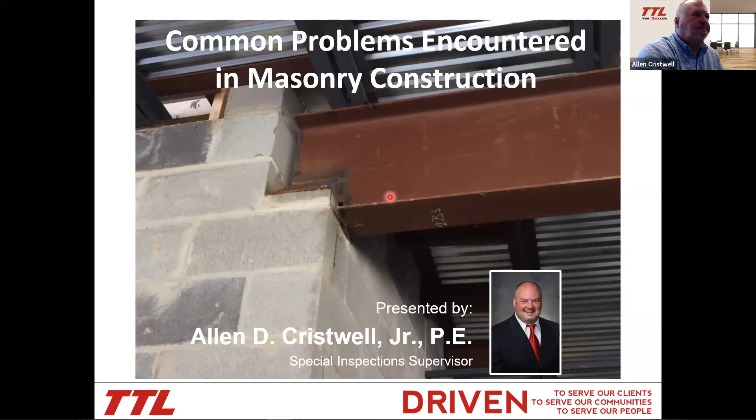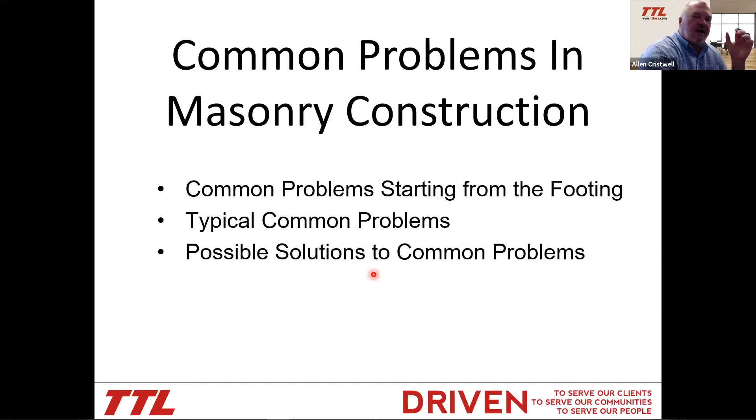So again, common problems encountered in masonry construction. Well, there's a lot of problems, but some of the most common will start at the footing. It's always important to get the footing correct. I'm going to talk about some typical problems, and then some solutions to common problems, and I'm going to put slides in here or photos to show these common problems. I don't have photos for all of it, but all the stuff I've experienced is in here, most of it.

So here we go, starting at the footing. Now the footing is important. If the reinforcement is correct from the footing, it makes everybody's job easier. If it's not correct in the first course or two, you have to fight it all the way up. And if they get several courses from the footing up, or from the top of slab up, and it's wrong, it's hard to drill and epoxy through a lot of courses of masonry. So it's always important to catch it, usually like the first course. If you miss it, it's tough, and if they lay up 8 courses, you can't even hardly see it. So the only way to repair it a lot of times is removing the wall. So if you catch it at the footing, it's the best, it'll make your life easy.

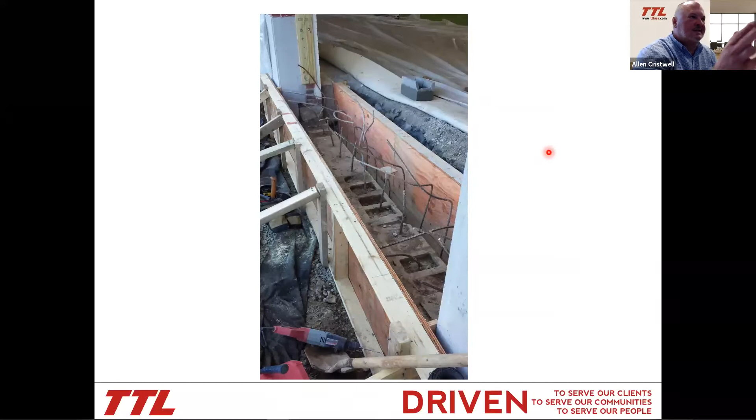Now this is a footing that was supposed to have block laid on it, and they decided to pour concrete on here because, of course, this footing, you couldn't lay block on this footing. So they decided, well, we'll just place concrete, then we'll pour the slab over. So they changed the design. There are two contractors involved: there's a concrete contractor and there's a masonry contractor. And this does cause problems because these contractors work independently of each other. On a small job, the concrete contractor will come in and do his work, and then the masonry contractor will show up to do his, and the concrete contractor will be gone.

On a large job, say a school or something that has many buildings, a lot of times it's nice that the concrete contractor's still on the job. The masonry guy just shows up, and if he's missing doweling, the concrete contractor can come and do it, but that's not always the case. So the concrete contractor lays out the dowels and he lays out the vertical reinforcement for the masonry contractor, usually without help or input from the masonry contractor.

And of course, then the masonry contractor comes back and he lays up several courses to the top of the slab, and the contractor comes back in and he pours the slab. It fills up those few courses above the footing. And when he does this, there's a lot of problems that get encountered.

So problems that typically get encountered, I would say, is window openings. There's certain things that just aren't considered, like window openings. That might not be shown on a structural drawing, or when you're doing footings, you may not worry about where the windows are, because you just don't think about it. Jambs, door jambs, you really don't care where those are either a lot of times.

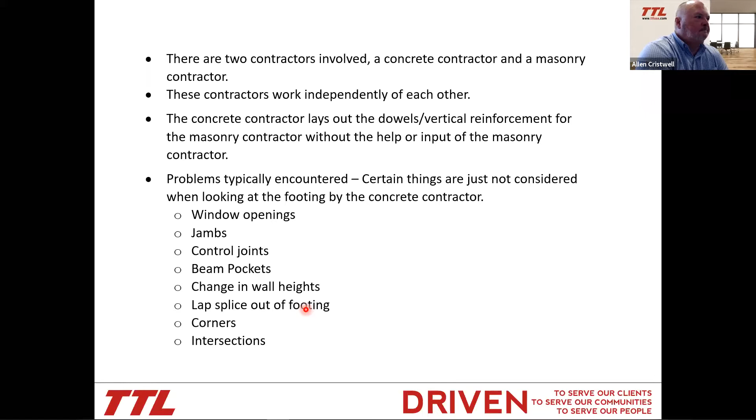So the concrete contractor has structural drawings and shop drawings, which may not show all locations for reinforcement. Structural drawings show typicals, which are applied throughout. Many times these typicals do not get applied during construction. Structural drawings typically do not show openings, control joints, etc.

The concrete contractor also has shop drawings, which may show corners and intersections on the layout, but will not show openings and control joints. So a lot of these concrete guys, they may have a crew out there, and they may be doing the footing, and they're not really thinking about, wow, I need architectural drawings out here for this, because they just don't think about it.

Well, architectural drawings show all your openings, shows your doors, shows your control joints. It may show the control joints in the slab. There's all kinds of things.

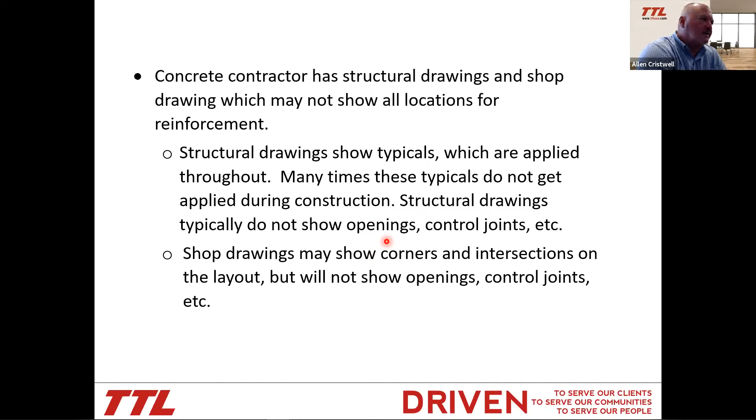The masonry contractor arrives on site and starts placing CMU. The masonry contractor will let you know very quickly it's not their job to drill and epoxy any missing dowels. And many times I've seen masonry workers lay block, either knowing or not knowing the doweling was wrong. And when notified that additional reinforcement is required, they've replied that it isn't really their job to place the reinforcement. and I need to go tell somebody else, and they'll just keep laying block.

So there is a little bit of juggling going on right there. It usually will work out, but you have to stay on it as an inspector or it'll get overlooked. Because again, once they get up so high, you can't correct it hardly. It's hard because the wall's too high. And of course, by this time, the concrete contractor has left the site. So it always seems to be a conflict.

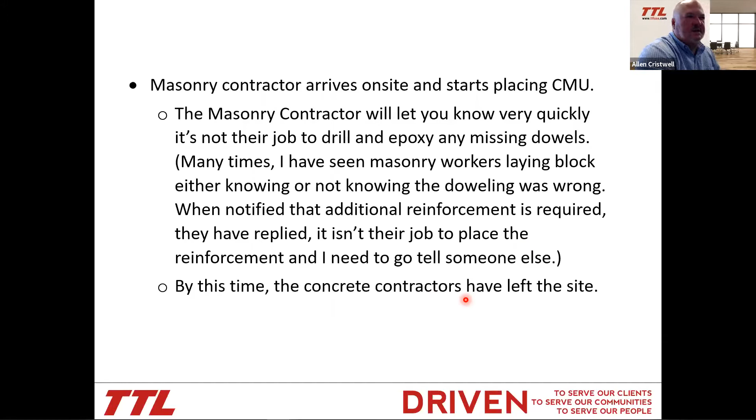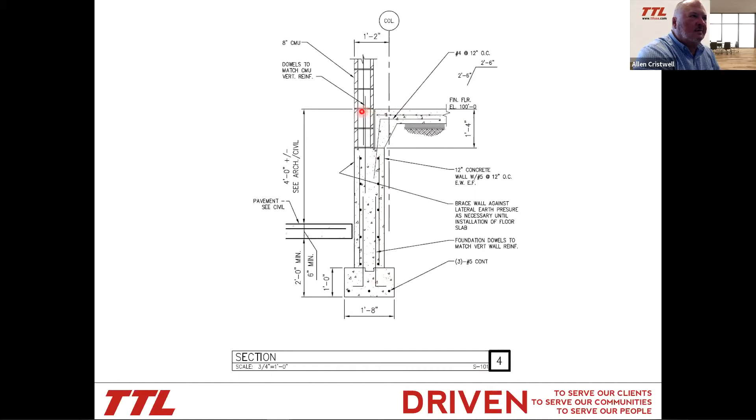Now, what happened on this job is the contractor came in where he was going to pour his slab. Well, he went ahead and filled his block up and didn't really worry about it. And he left too short of a lap splice. And this is what you'll get.

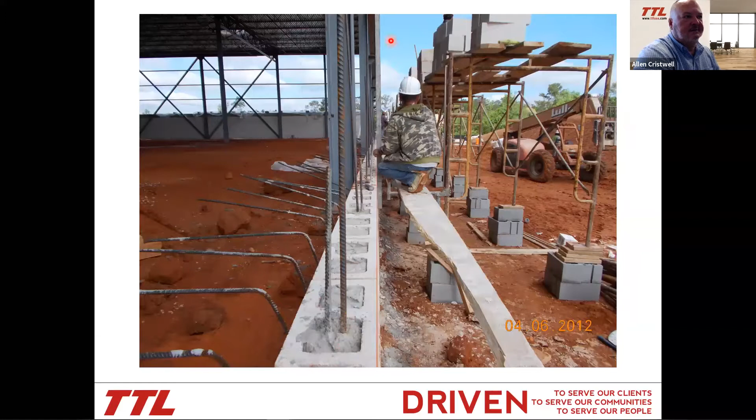This was about 15 inches. And you can say, well, that's 16 inches right there. So, you know, that was like 14, 15 inches. Some were a little high, some were a little low. So the result of this being overlooked was you had to drill and epoxy all the reinforcement, doweling.

I also want y'all to pay attention to some of the scaffolding and these boards, some of the scaffolding boards, because I want to talk about scaffolding later.

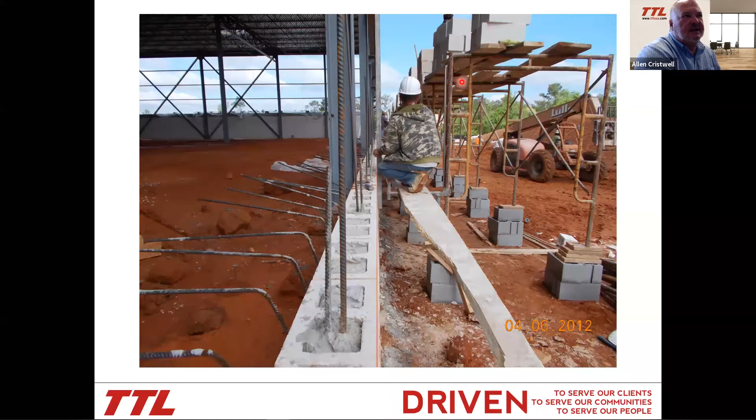Here's another example. Again, there's a cut, I think 5 on SO2. If you look here, here's your footing, and here's your center dowel coming up - that's the concrete contractor's job. Then the mason comes in and does this, then the concrete guy comes back and does this. You just got a lot of trades back and forth.

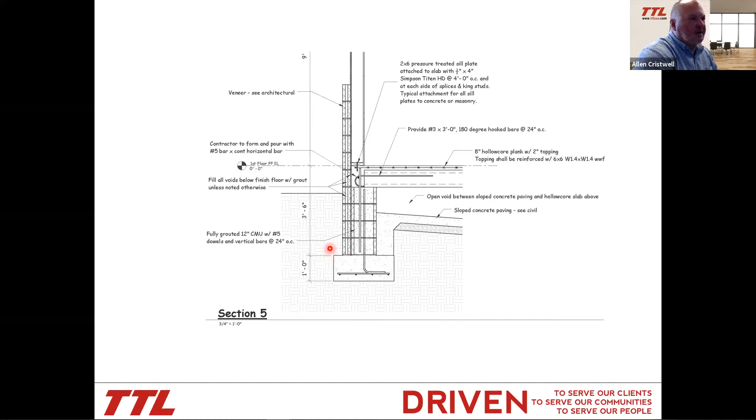So I want to show you this picture. Here's the footing, here's the center of the footing going through here, and this is the doweling. Can y'all see how that dowel goes? Right here, the dowel is all the way over here - sometimes it's off in the dirt, so you'd be laying your block out here on the dirt. This is a common problem, happens quite a bit. Just want to show that to you guys.

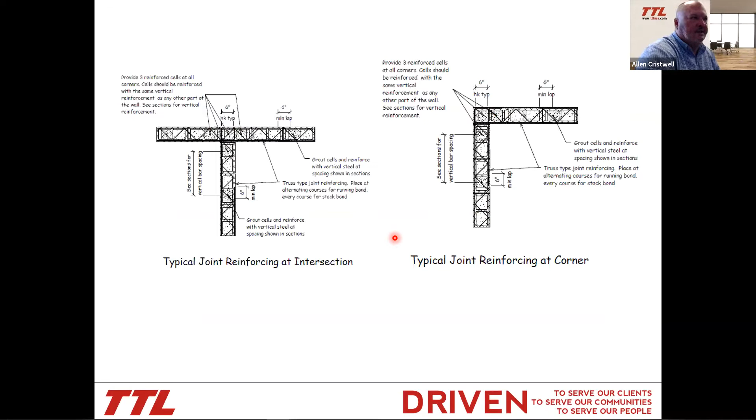Again, reinforcing in corners and intersections. There's 1, 2, 3, 4 in this one, and 1, 2, 3 in this one. This is common, this would be in the front of the typical sections, in structural drawings, in the typical sections - might be in shop drawings too. It's hard to say, it'll be in a lot of different places, but it may not be on the actual plan view for the foundation. It usually isn't, sometimes it is. I've seen structural drawings that had that, but not very often.

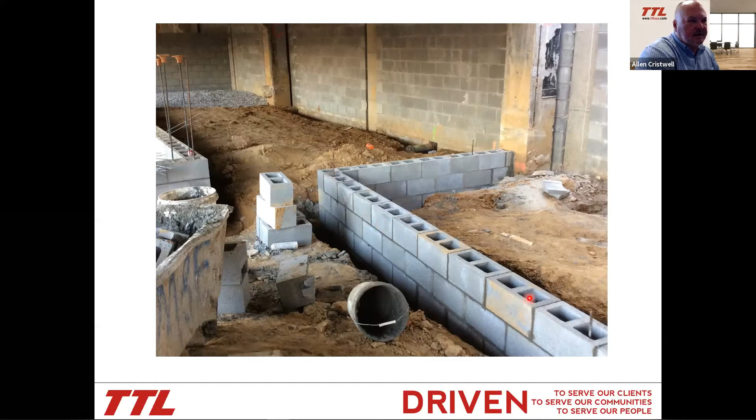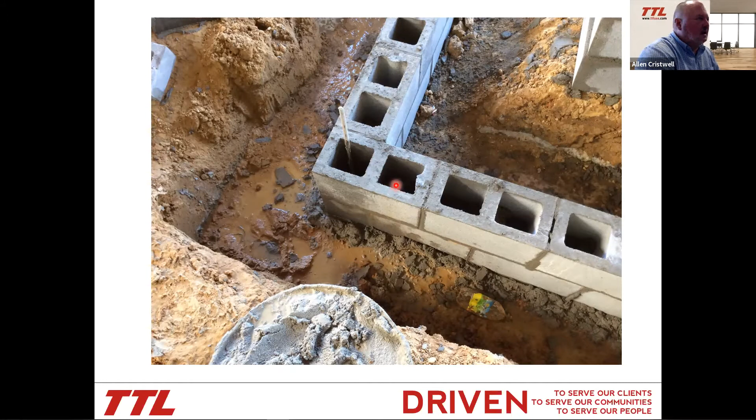And of course you can see here our corners are missing a few. This one they did pretty good - you see here, look at this spacing. They've just pretty much missed it all. Again, just common problems, you got to correct this. 1, 2, 3 - so you should have had 3 in the corner. Again, should have had 1, 2, 3 in the corner, then 1, 2, 3, 4 over here. And you see, since this wasn't caught right away, a lot of this will have to be torn down.

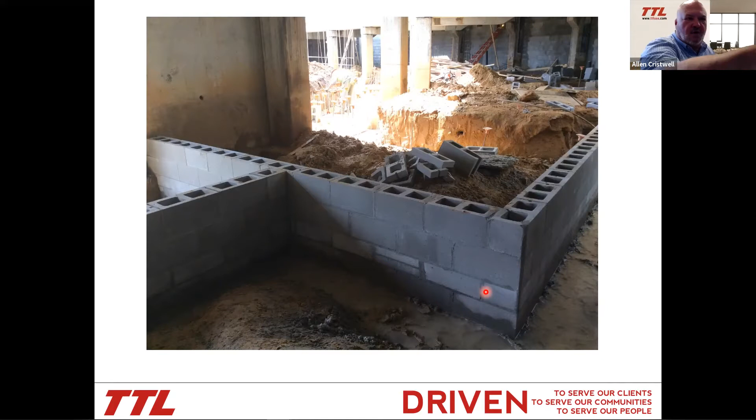Because you can't drill and epoxy this - it's hard to clean the holes out. You have to blow them and brush them, blow them and brush them 3 times. And then there's mortar droppings down in here. It's just very difficult if it gets away from you.

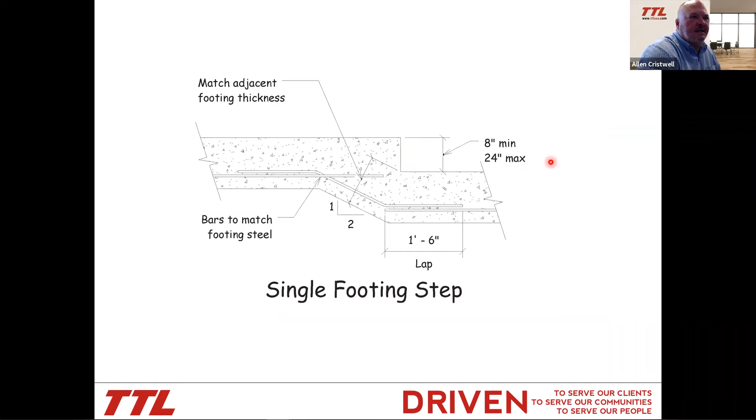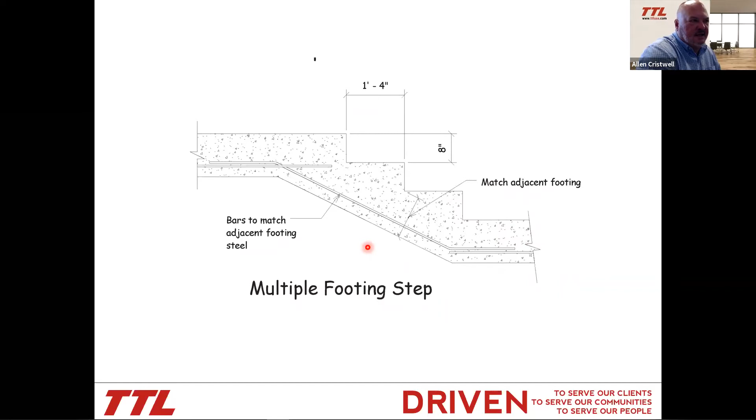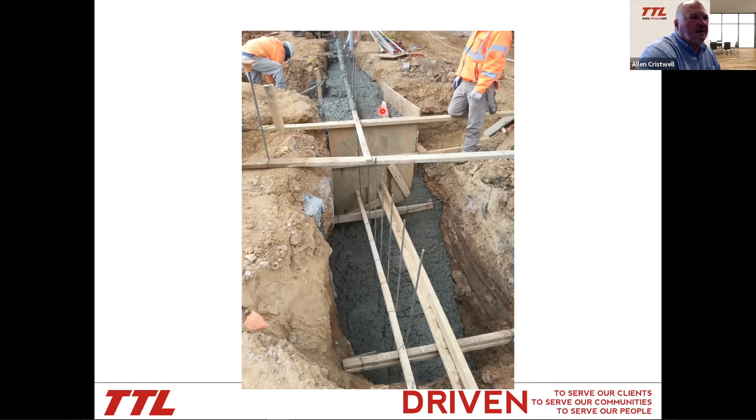Here's a step I wanted to bring up - 8-inch step, 24 inches max. Again, if you're going to go more than 24 inches, you might have multiple steps. The reason I put this in here - it's a concrete thing but it's also a masonry thing. So here they were pouring this step, and I said listen, you got to vibrate this, you got to consolidate it. So they said okay, and then they started consolidating it and started saying hey, it's blowing out, we're not going to consolidate it. So whatever. And then I go back, and this is what was actually out there.

That's a 57, I don't know if y'all could see that. So that was a little more than a 24-inch step. The problem with this really - and we're going to talk about cleanouts later - is there's 8 courses, 1, 2, it goes up 8, right? And from here down you've got 1, 2, 3, 4, a rip, 5, 6, 7 - you got 7 in a rip, so you almost have 8 courses there. So you'd have about 16 courses when they want to start pouring back here, and they'll just want to pour straight across this because for some reason they want to ignore that. So that's something to keep an eye on.

So when you're stepping down and stepping up quite a bit, because some utilities can be very deep out there, you just have to be careful.

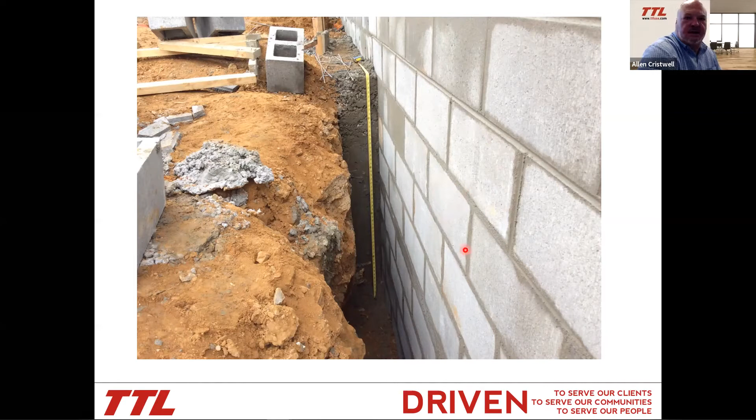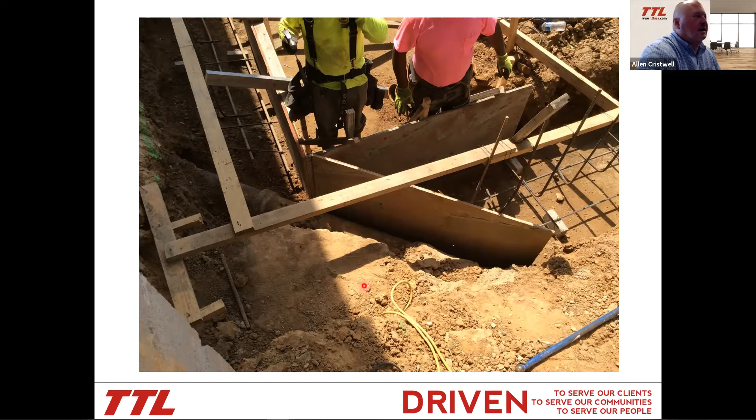This again is a footing. Here's a pipe - you see this pipe? It's a utility, and there's some concrete. This doesn't step down and go under it or anything. They poured this because they wanted to lay the block straight across, and they probably would have pulled it off. And again, this is another thing - if you come out late, I had 7 courses. It used to be 7.

7.5 courses was a grout lift, and now for pour height, they changed it, so it's 8 courses now, so it's 5'4", which is 64 inches.

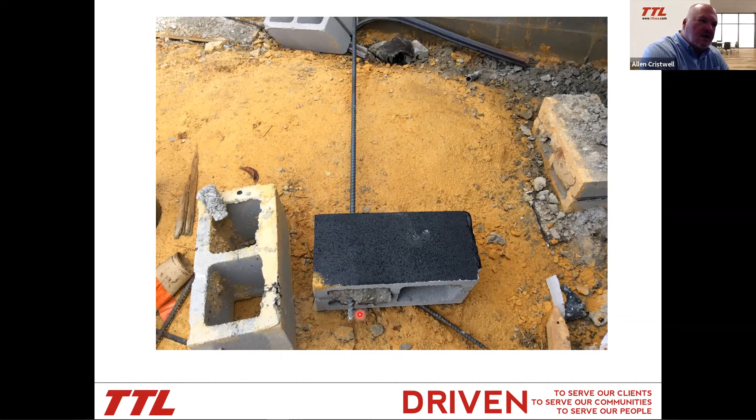I was climbing across, there was a ladder across these 2 walls, and you can see it's already been sprayed with water repellent. I was pulling on this rebar to cross over and go down the other side of the ladder, and I pulled this off. This is what was sticking out of the wall. I thought this was the reinforcement, and when I looked at it, I thought your wall looks pretty good, I didn't see the whole thing, but it looks like you've got it at the right spacing. What happened was the wall was hollow and these were just stuck in there. So if you miss your inspections, you just don't know what you're going to get.

The next thing I like to talk about is typical common problems. There's a lot of them, and probably one of the first ones you'll run into on a job is going to be the pour height, or the grout pour height or lift height.

If it's a job where the wall tops out at 16 feet or something, they'll want to just try to pour the whole thing, and it runs into problems. But grout pour height and grout lift heights are addressed in the specifications for masonry structures: TMS 602-13, ACI 530.1-13, and ASCE 6-13. I'll refer to this probably as just ACI 530 from here on out, Section 3.5C, Table 7, and 3.5D.

So grout space requirements - this is the cells in your wall, which is your grout space. As these things are offset and they're built up and they have reinforcement in them and mortar protrusions into them - which, by the way, shouldn't be more than 1/2 inch to meet code, but it's very difficult to measure mortar protrusions and fix them - but if you had a 3x3 cell, which is pretty common, you could get that with fine grout and coarse grout, you could go up to 24 feet.

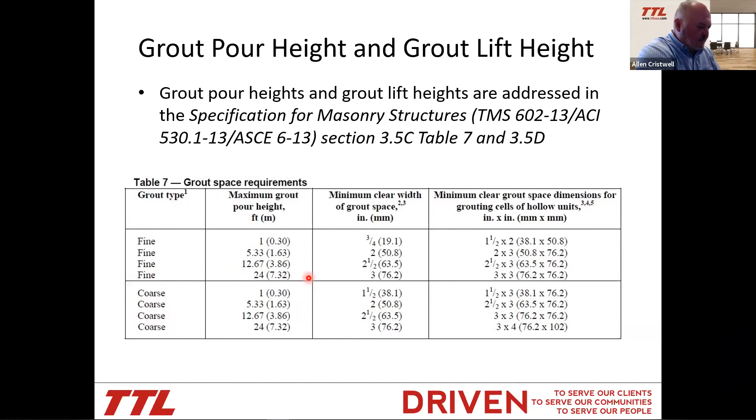Now you can't pour 24 feet at one time - that's a pour height. A grout lift can be 12'8", so if you did do the 24 feet, you could only pour 12'8" at a time. You can't construct more than 24 feet though. So to pour a grout lift at 12'8", there's several conditions that need to be met.

The masonry is cured for 4 hours. The grout slump is maintained between 10 and 12 inches - and it's been a little while, but I'm thinking normally grout's 8 to 11 maybe, but this needs to be 10 to 12. There are no intermediate bond beams within the grout pour.

If intermediate bond beams are present in the grout lift, limit the height of the grout lift to the bottom of the lowest bond beam - this is right out of the code. Now, I'm going to talk about cleanouts later, but this is where the code doesn't make a lot of sense to me. I've asked structural engineers and other inspectors, and it's always been a problem. It used to not be like that, but it is now.

So if you went to the bottom of a bond beam and then placed 7 courses on top of that bond beam, all your mortar drippings would fall into that bond beam. I just don't see how that could be good for your wall, because mortar may be 1800 PSI, and then its drippings, it's not solid. So your lower course where your bond beam is could have very weak mortar chips and things in with the grout. I think there's kind of an issue there.

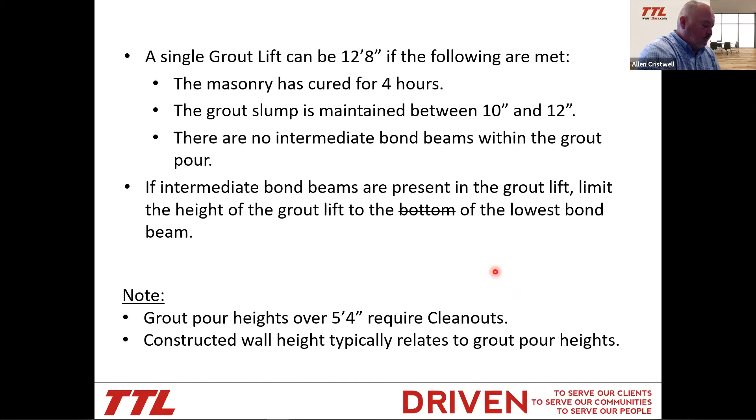If you do a wall this high, you've got to think about mechanical consolidation, and you have to vibrate that wall. Most vibrators don't have what I call a stinger, the probe that comes out, long enough for this, usually 12 feet. Normally they're short and battery operated, so that can be an issue.

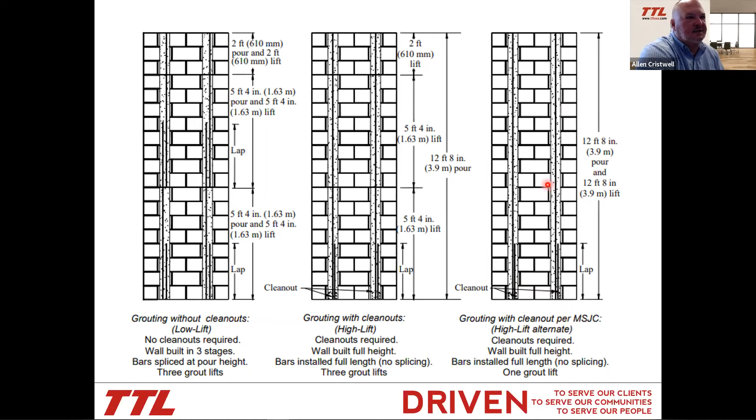So cleanouts. I mentioned cleanouts earlier. I had this slide in the beginning and moved it to the back. I want to make sure you understand what cleanouts are. Cleanouts are openings of a specific size and spacing for removal of debris from the bottom of the grout space, usually at the bottom course. It's addressed in specifications for masonry structures, ACI 530.1, 3.2F.

Cleanouts are installed when grout pour heights exceed 5'4", which we said earlier, in the areas to be grouted. In solid masonry, cleanouts are every 32 inches. If it's not solid and only grouted where the reinforcement is, say the reinforcement is 48 inches on center, you'd have a cleanout everywhere there's a reinforcement bar at the bottom of the grout space. Minimum cleanouts are roughly 3 inches by 3 inches.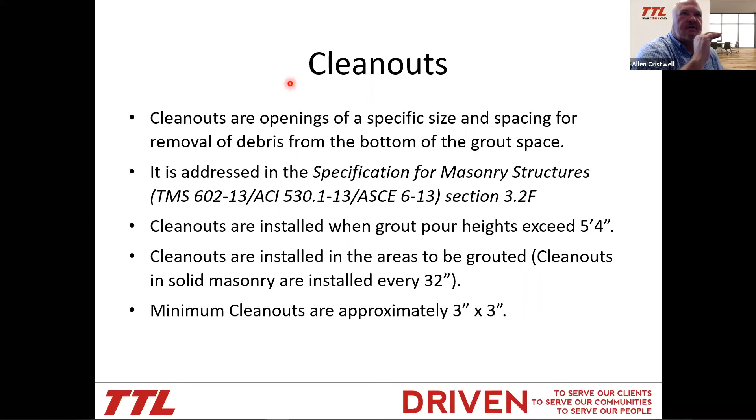I want to show you the importance of cleanouts, and the importance of having too many courses without them. I'm going to show you why it's important in these next few slides.

This is what I showed you earlier, the first picture. There was a footing here. Right here is solid, because that's where the slab's going to pour up to. So this guy said you need cleanouts in the bottom course. Well, he tried to get into the bottom course, and it was kind of solid, like over there. See those? Those are solid. So he went up and said, these are empty. And I said, well, you've got to take the face shells off, you've got to clean it out.

Now, if this was a cleanout, it would be a square 3x3, or they'll punch a hole in it. Say this is going to get hat channel and gypsum board on it — wouldn't be that big of a deal. They could put plywood over it, pour it, remove the plywood, and put the gyp board over. But this is exposed, so they had to remove the face shells.

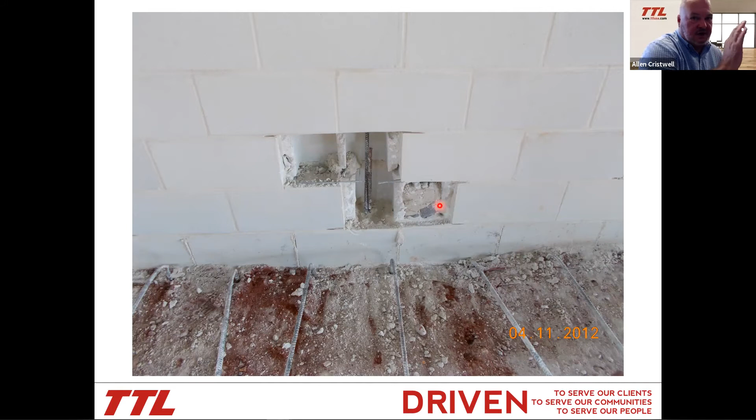When you remove the face, you can see this short bar coming out, where they had to drill and epoxy it in. But you can see the debris in here — these are mortar drippings, you see that? That's why you have cleanouts when you go over too many courses, over 8 courses, because this is your bottom course, which is supposed to be maybe 2,000 or 3,000 PSI grout. In reality, you have some 1,800 PSI mortar if it was really good, not in drippings. But it's not like that — this is what's in your wall. All this has got to be cleaned out. That's what cleanouts are for.

A lot of times I've seen cleanouts put in, or not put in. I've had the contractor call an engineer or someone in charge and say, hey, can we just drill a hole in there? When we drill a hole, we can see if the grout's getting out, because it'll run out the hole we drill in the face. I've seen some of them get away with it. The problem is, you can drill a hole in that, and grout will probably run out of it, but you just need to realize it's just not very good.

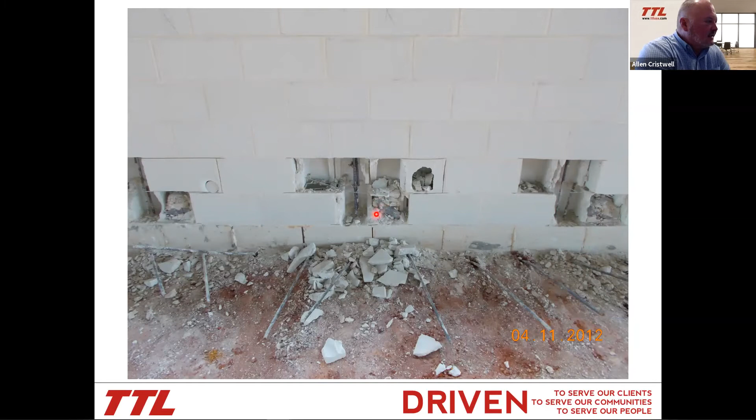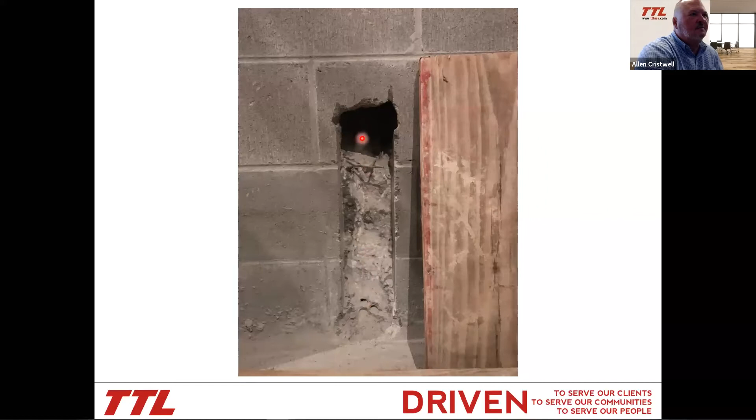You've got to be careful. Here's where they've missed some rebar in a wall. We had to go back, find where the reinforcement was missing, and revisit this area. So we located where the reinforcement needed to go, and had to clean this out so we could get in, drill down into the footing, replace it, and put some reinforcement in this wall. This was a high security type room.

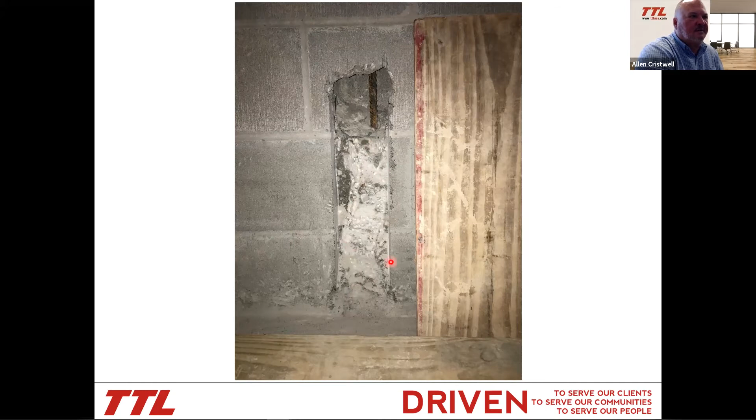Well, they didn't clean it out, and I said nope, and they dropped it to right there. So here, unreinforced at the bottom of your wall. And it's not always that high. Here it was a little lower, but they just couldn't clean it out. Here it's a little higher.

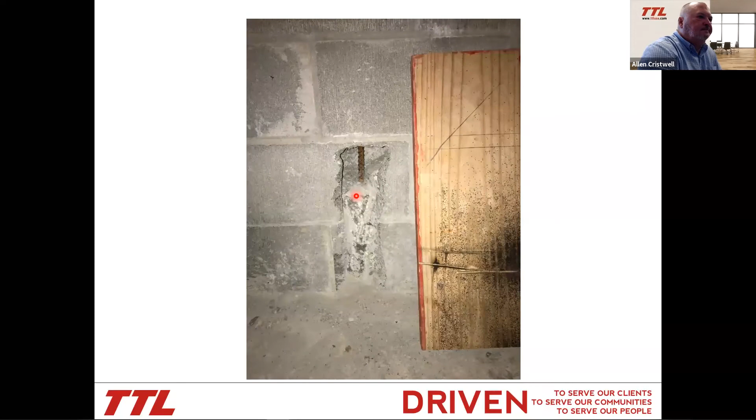Speaking of cleanouts, I was on a project once. So here you see this block. Now this foundation block is 8 by 8 by 16 nominal size, basically 7 and 5/8 by 15 and 5/8, with a 3/8 mortar joint. But this block is 4 inches by 8 inches by 16 nominal.

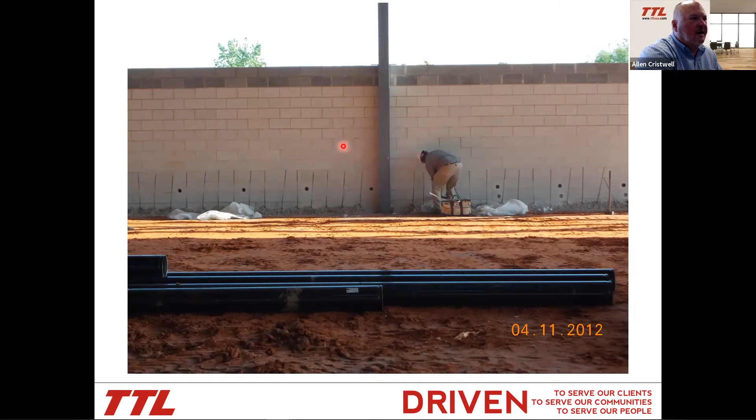The thing about this block is, you have cleanouts, right? You can go every eight courses. Well, if you went more than that block wall I showed you guys earlier, like this was 1, 2, 3, 4, 5, 6, 7, 8, 9, 10, 11, 12, 13 courses. That was 13 courses. If you have something like this, you normally can go 8 courses.

Well, this is half the size of a normal block, so you could lay 16 courses of this block and meet code. So you just need to keep that in mind, why cleanouts are there. And if you've got more mortar joints, you have more mortar drippings and things you just need to remember.

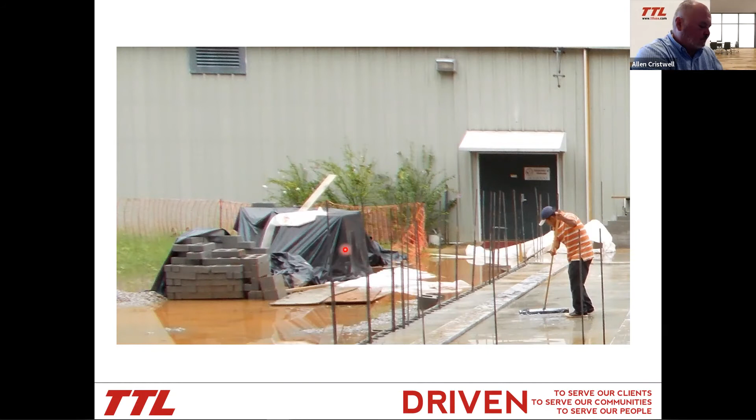Next thing I like to talk about is bearing length, a very common problem in lintels. Bearing length in lintels is shown on a lintel schedule, and it's contained in the front of the structural drawings, typically. Many times during periodic observations, a bearing length of 8 inches will be found throughout most of the masonry.

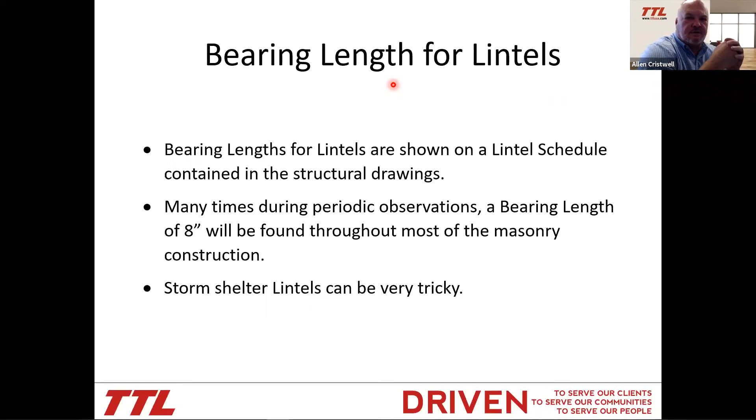So here's a typical lintel you can see right here. Let's just look, for example, at 8 feet. If it's less than 4 foot, it's just 8 inches. Less than 8 feet, it's 2 block high, 2 CMU blocks with 2 number 5s in the bottom, basically 16 inches deep with 2 number 5s. If you look down here, it has an 8-inch bearing. Those are typical. So when they come up to 10 or go to 12, you see how this changes at 12, you get a different bearing length.

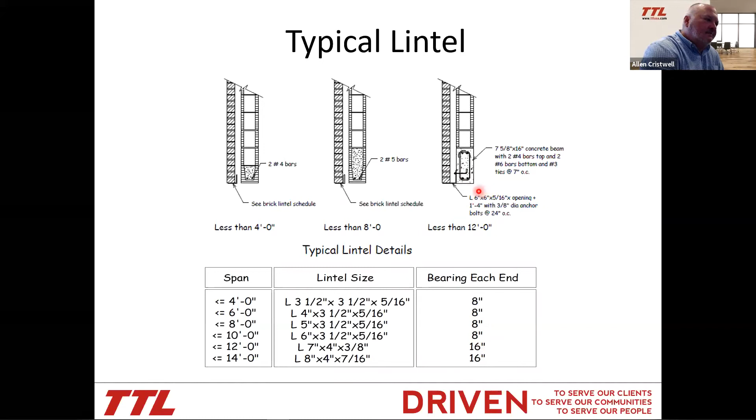Well, they just miss that a lot. It's just a common problem. And storm shelter lintels are a little more complicated. You see right here, it says provide 24 inches of bearing on each end. I couldn't fit all this on one slide, so it's 2 slides for the lintel of the bearing.

So let's take a look at 8 foot 4 inches masonry, okay? So it's now 32 inches, where the other one was 16. This one's 32, so it's twice as deep. It's got A bars, 2 number 5. It's got 2 number 5 B bars. Doesn't have C bars. It's got 2 number 5 D bars, which is on the next page.

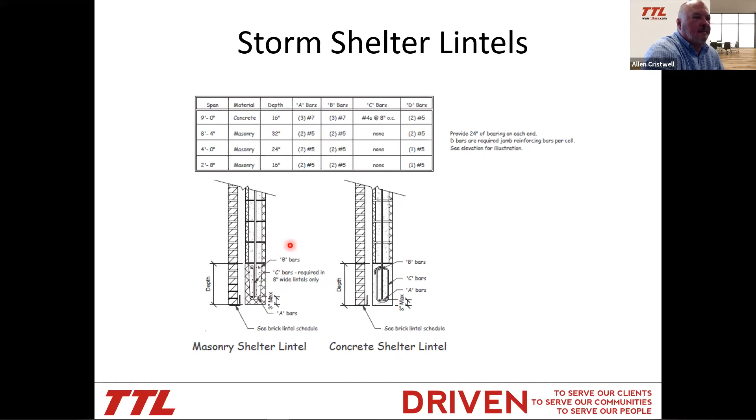But if you look down here, so there's the C's, it's like a hook, a tie. So down here you've got 2 number 5s, you've got 2 number 5s. Even though this looks like a 16, it's actually 32 inches. So it's twice the depth, and it's got 3 times the length on the bearing.

And if you look here, D bars, these are D bars per cell, so you have quite a few D bars. You have 2 number 5s. And if you look at that, so you've got 2 number 5s here, 2 number 5s here, and 2 number 5s here. Now you also will look, you'll see there's some hooks in here.

Extend the rebar 2 foot past the opening and provide a hook. This hook comes, 2 number 5s is what we had at the top, so you've got 2 number 5s and you've got 1, 2, 3 hooks. So you've got matching D bars down here, so you got 1, 2, 3, and then up top, you got 1, 2. So you've got verticals in here too.

That's 5. You got 5 number 5 bars.

This leads me to the next thing I want to talk about, and that's congestion. You have to be very careful of congestion in reinforcement. I'll talk about that in a second, but I just wanted to finish this lintel schedule and tell you one more thing that's a problem, and I see it all the time.

So if they're pouring this lift right here from here down, what they'll do is come through and stick their next piece of reinforcement in for the lap splice. Well, they'll still pour this solid. And what happens is they forget there's actually hooks in there, because the standard procedure would be to just grout this solid from here down and then build the next section of wall.

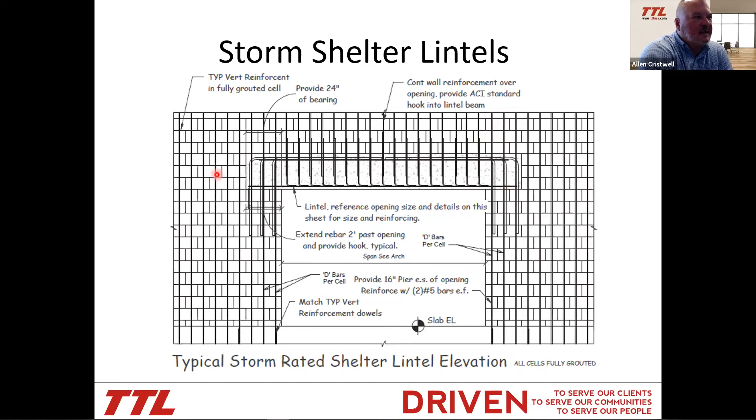Congestion of reinforcement, as I was just telling you, with the 2 upper bars in the lintels, and then 3 more hook bars, that's 5 number 5s. And they each have verticals going through them, which makes 6 number 5s. That doesn't leave you a lot of room for aggregate to get through, much less a vibrator.

To consolidate the concrete, corners can become very congested. Some may have 2 number 5 bars running, and then some will put 2 corner bars in there, so that's 1, 2, 3, 4 number 5s. And if there's a vertical with a hook, that's 5 number 5s, and that can be an 8-inch wall. That's almost impossible to get a vibrator through, it doesn't get very much grout, and it doesn't meet the correct coverages for the code or anything like that.

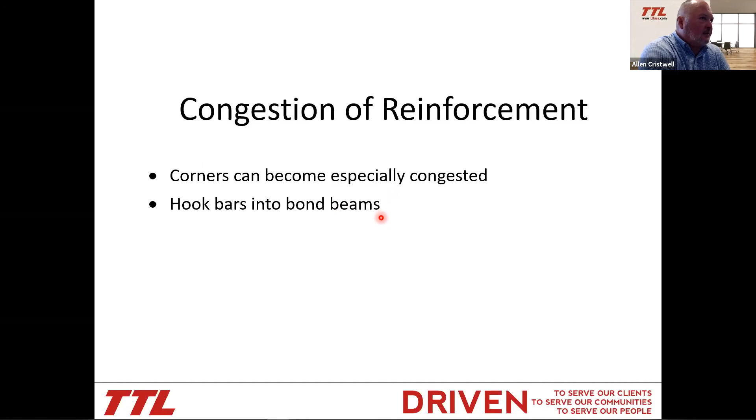Hook bars into bond beams, well I just talked about that. So I want to show you a couple things here on bond beams located in non-traditional locations. That was congestion, I want to go on now to bond beams located in non-traditional locations.

Walls that have double bond beams or triple bond beams, or maybe floor levels that have a bond beam for the bar joist, and then maybe a bond beam above that to bolt angles to for slabs or things of that nature.

Stairwells have metal stair pans. They get filled with concrete and bolt inside these stairwells, and they have bond beams every so often. If that's missed, there's nothing to bolt the stairwell to. And intermediate bond beams, those would be some maybe at 8 foot, say typically on a wall, that may have one in it every 8 foot or something that runs around the whole building. It's easy to get those missed.

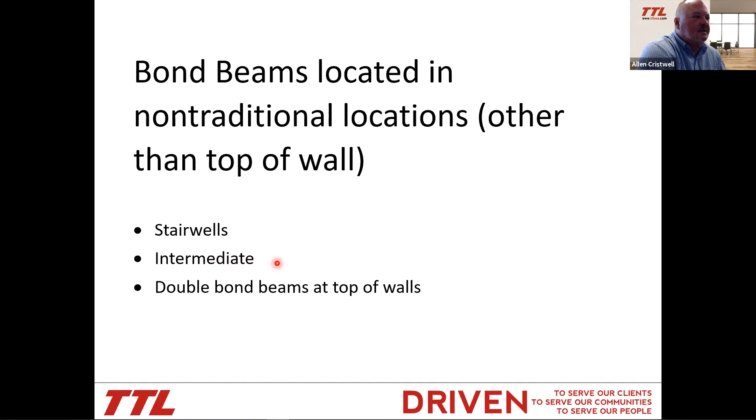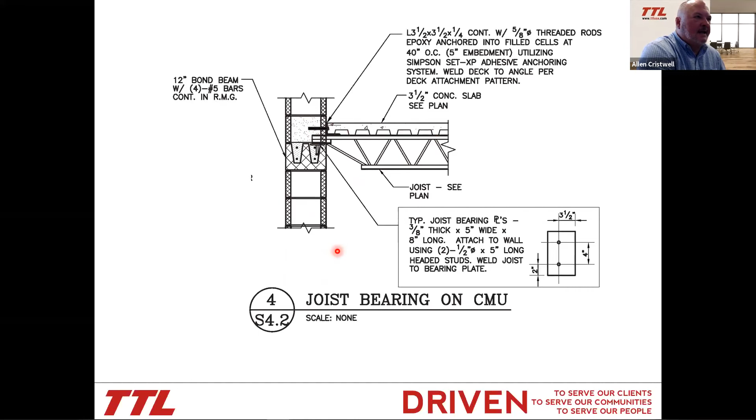Here's an example, here's 4 on S4.2. This is a mezzanine, and you can see right here the bar joist comes into this bond beam, which is a pretty strong bond beam, but it's 12 inches. It's got an angle here where that bolts into it, and then the slab is poured on top. This is really what happened when I went out there.

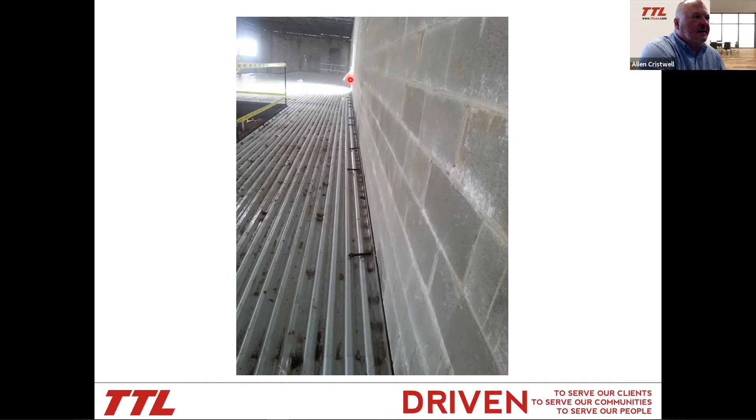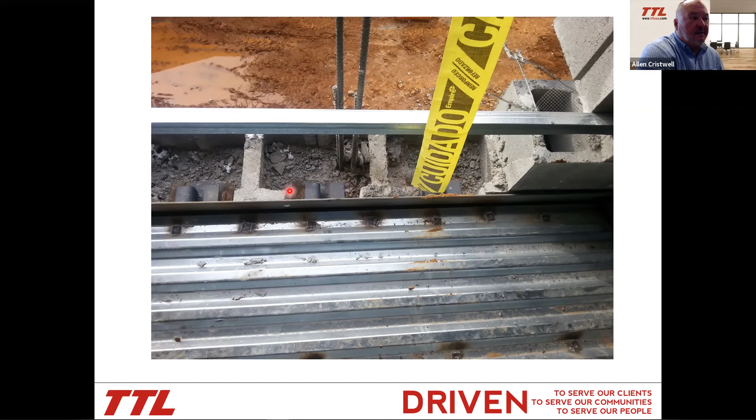None of the anchor bolts were in. They were missing, and you can't see them down here because I didn't go pull them out. Actually most all of this was missed, and there was an opening in here. We were called out to check it out, and you could see there are some bearing plates, so the joists are on the bearing plates, but the beam, the angle's being bolted into, is in the air here. This was supposed to be full according to the drawing, and it's not. So the bearing plate could be at the wrong elevation, this thing could maybe be built at the wrong height. It's hard to say.

Anyway, here's a stairwell. Again, these brackets are going to hold up the stair pan. And this is another mezzanine, I think, at the top up here maybe, and they couldn't get their brackets in.

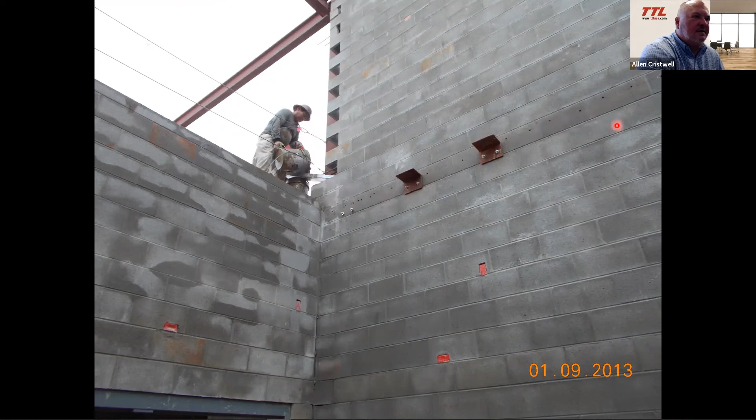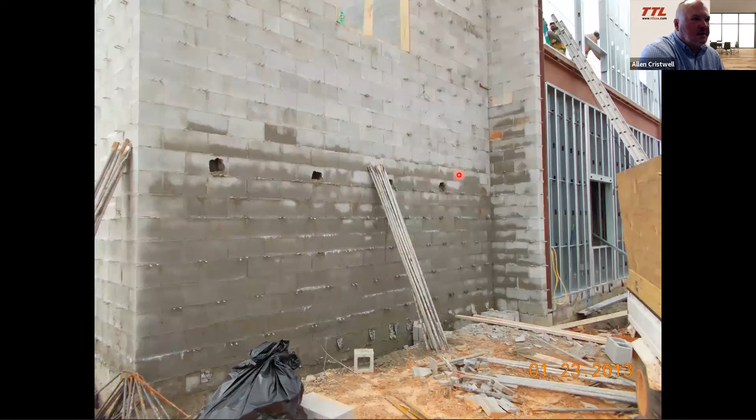So here they are trying to fill this. You can see it's not working too well. And then 1, 2, 3, here's where they've had to fill this bond beam in. They went back and punched holes in it. You can see right here, here's their stair pan.

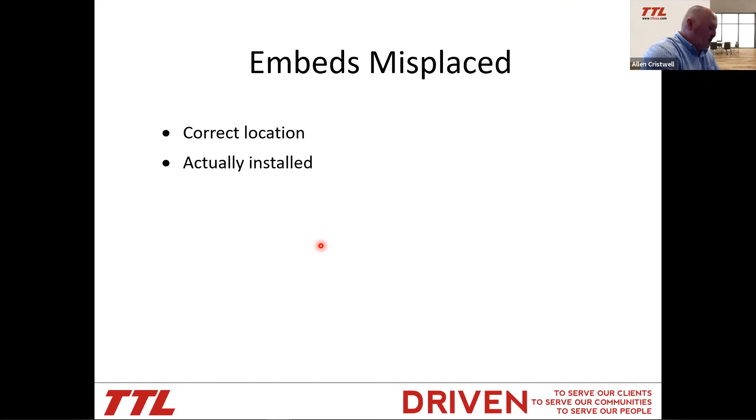Embeds being misplaced. Quite a few embeds get misplaced. In the beginning I've got a couple pictures I want to show you. They can be at the wrong elevation, horizontal and vertical, or just wrong. All kinds of things. This was in the beginning slide.

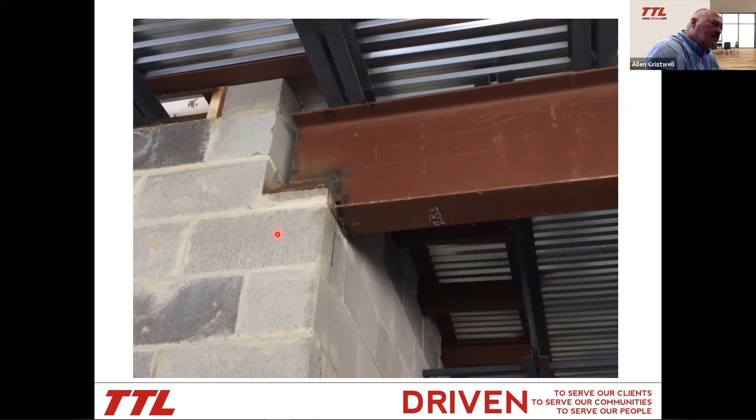This wall probably should have several vertical reinforcement, 2 to 4 probably. And then right here you've got this plate, which has got shear studs or Nelson studs coming down, and all this is grouted. So a structural steel guy probably isn't prepared to work on all this. So he modified his work, and the mason probably has it in the wrong spot, but he's long gone.

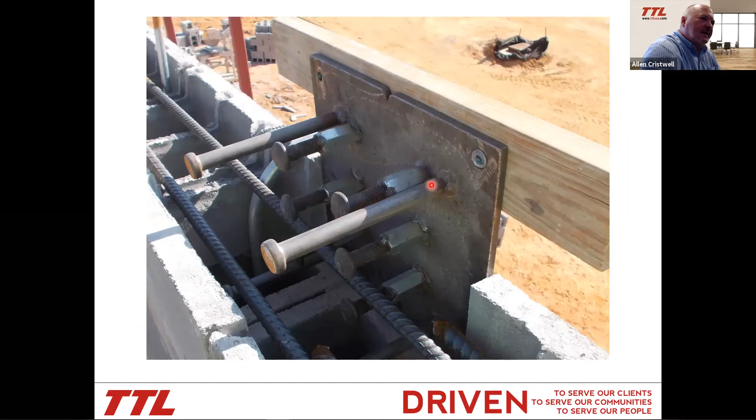This I just put in. This is a homemade embed plate. It's kind of standard, but it's got some bolts and extensions. I just threw it in there because you just never know what you're going to see. I don't know who invented this, but it's in there.

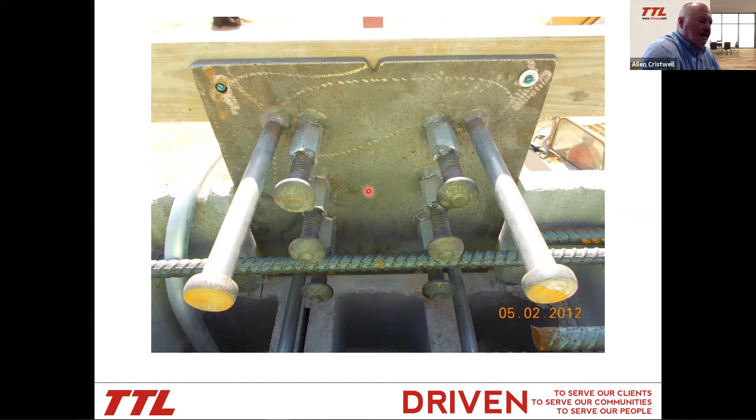Putting in embedments, this was supposed to be a Hilti type repair mortar - I mean epoxy - but on the job it was actually mortar repair, maybe from Lowe's or something, I don't know. So you really have to check everything.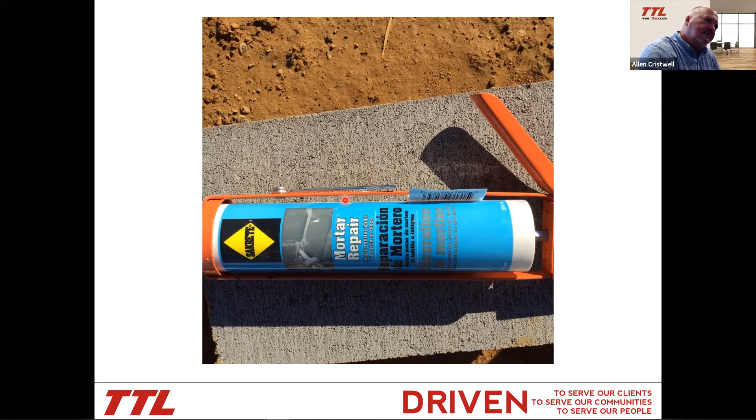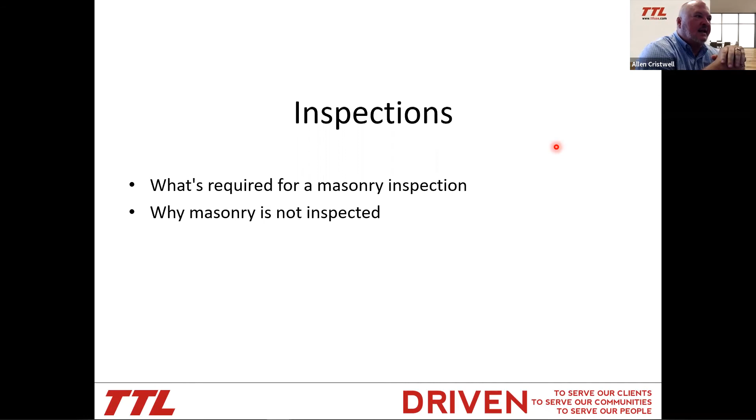Getting towards the end here, I like to talk about inspections. And I like to ask, what's required for a masonry inspection, and then I like to talk about why it's not inspected. It's really pretty big deal.

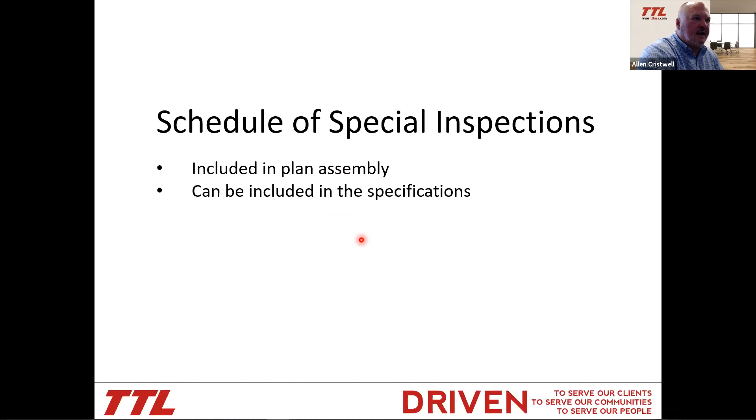So you have a schedule of special inspections. Now that schedule is included in the plan assembly, and it can be included in the specifications. Some people may not want it in their plan assembly - they may want it in the specifications. It is in the construction documents, they're fine. And this is a pretty detailed one in the special inspection schedule.

This is for a level B, and you can see like grout space - you have to periodically look at that. So you don't have to look at every piece of grout space, but you have to look at it, unless there would be cleanouts in there where you're supposed to look at it.

So 5.02, grade, type, and size of reinforcement - you would need to look at that. Placement of grout - you need to see it in place, continuous.

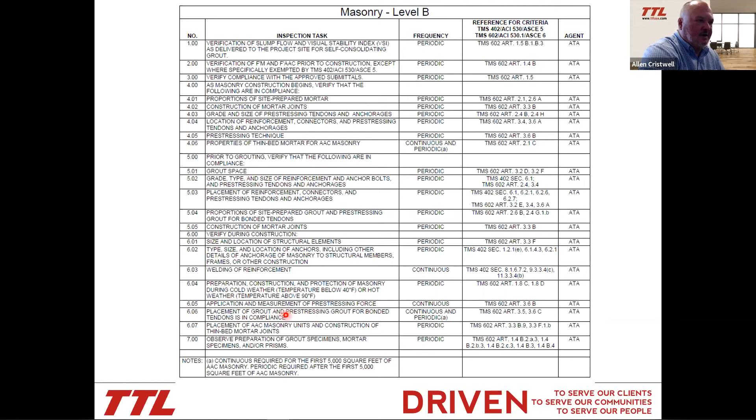Now you can also use the building code. The building code's probably going to refer you to ACI 530. It's going to be inclusive. Under typical inspections required by the building code, requirements for masonry structures, ACI 530 - there's 3 levels. There's level A, which is the easiest level, there's level B, and there's level C. Level C is the most stringent.

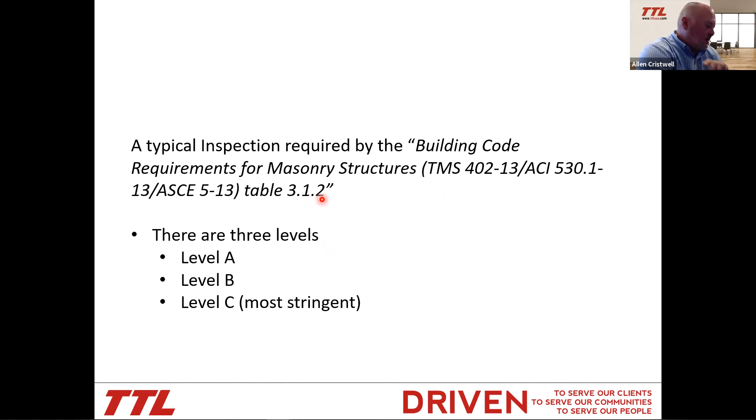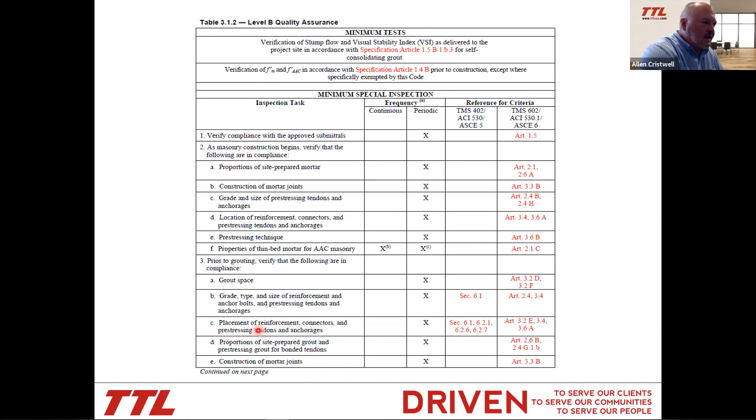Table 3.1.2 will list this, and I'm going to show you this table. We'll get into this in a minute here. For example, 3A, grout space - periodic observation. Grade, type, size of reinforcement - periodic. What that means is periodic, I mean it doesn't mean you just kind of look at a little bit of it. It says you don't have to be out there the whole time they're working on it. You can go out and do an inspection, look at it all, and leave, or you can monitor the grout placement, which, as we've seen earlier in that particular example, was continuous, so you'd have to stay. 3C, placement of reinforcement, periodic.

This is a continuation, it says continued - it's out of the code. Type, size, and location of anchors, including other details of anchorage of masonry.

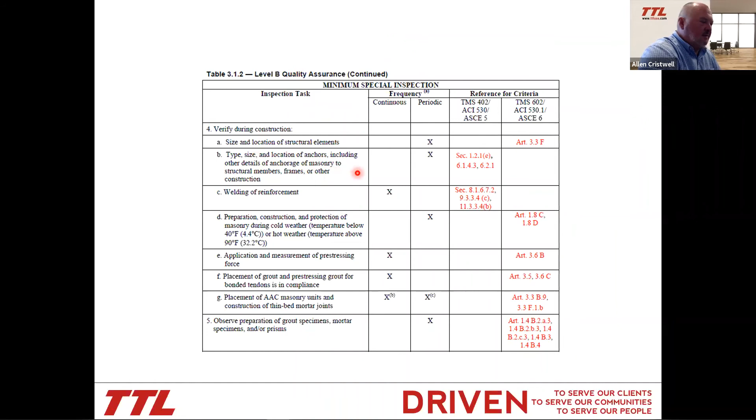This is what I want to talk about during inspections - why masonry doesn't get inspected. Masonry is typically not a jurisdictional inspection, meaning it's not what the building officials look at. So your building inspector is not looking at masonry. He'll look at brick ties and things of that nature, but he doesn't look at the placement of the CMU.

If masonry is empirically designed, it does not require special inspections unless it's in risk category 4. Category 4 is like hospitals, fire stations, police stations. Category 1 is dwellings with not many people. Category 2 is what's not in 1, 3, and 4, and category 3 is a high occupancy area. But category 4 is the one you still have to inspect if it's empirically designed, which just means it's kind of outside the code.

So what leads me to this next point is, if it's not jurisdictional and not a special inspection, nobody's looking at that trade's work. That trade doesn't get inspected like the electricians, the plumbing, the framing, or the concrete. Even concrete, which can be a special inspection, often gets looked at by jurisdictional building inspectors. Gypsum board, the screw patterns - there's lots of in-wall inspections on a building, but masonry will slip through.

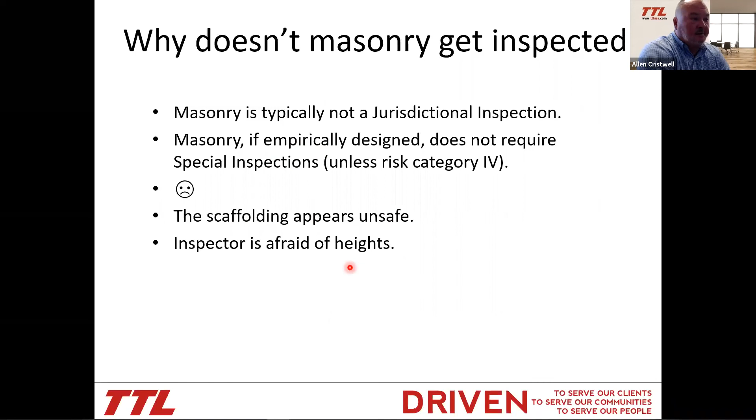There are other issues. The scaffolding can appear unsafe, and the inspector may be afraid of heights. I'll just show you a few things. This may appear unsafe, but this actually was safe - it passed an OSHA inspection. But just look at all this. I don't know, it's like the Incas built it. I don't want nothing to do with it, but it had to go up there.

It was tricky. Here's another one - again, very high. I took some of the other pictures out because they were too spooky. So, if you're afraid of heights, it's not your cup of tea.

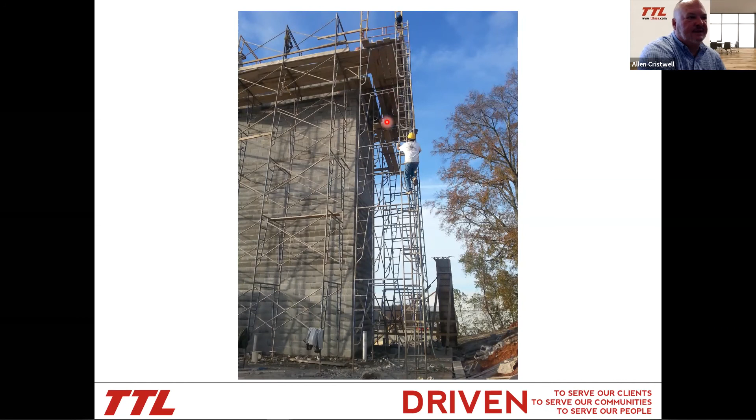So the last thing I want to wrap up with is some solutions to common problems. Number one, you could have a qualified inspector for special inspections. We do that work, and on masonry, here's what we look at.

We look at proportions of site prepared mortar. We look at construction of mortar joints. We look at element tolerances, for example horizontal and vertical alignment - it's all spelled out in the code. We look at the reinforcing steel - the type, the grade, the size, grade 60 probably. We'll look at that.

So we'll look for those markings - the type, is it billet steel? Type S, if it's rail steel, it's not going to be, but you have to make sure. I found the wrong grade on several projects. We check spacing and the required lap splice, cleanliness of the reinforcement, acceptable location tolerances and where it's located, grout placement, grout space cleanliness, required coverages, and consolidation. That's what we look for in an inspection.

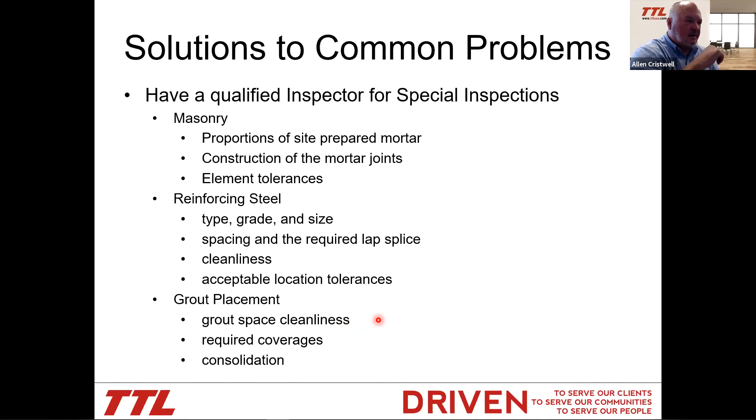Another possible solution would be to require a representative from the masonry contractor's company to be present during the layout of the doweling during the footing placement. That would be a lot of help and would save a lot of problems, because what usually happens is they drill and epoxy additional reinforcement during the masonry layout, and there have to be some dealings to get this done.

Shop drawings and structural drawings could be improved, though I don't know if it would help that much since you have architectural drawings used along with these two. I've seen some structural drawings that show it all, but we still had issues. Masonry contractors typically work with electrical, plumbing, and mechanical contractors for setting electrical boxes, plumbing openings, and duct openings, so they do work together. I want to make sure y'all don't think the concrete contractor and the electrical contractor can't get along - that's not the case, they're just not on the job at the same time.